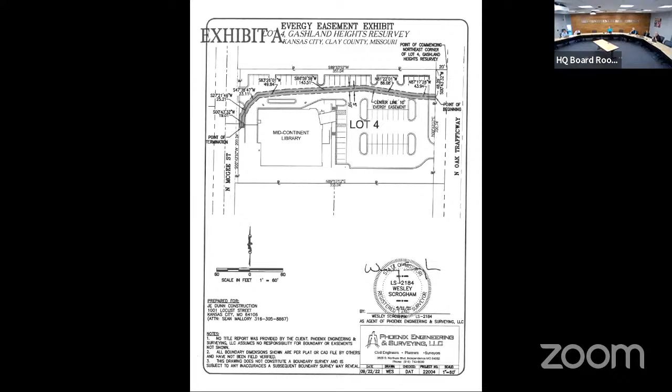Any discussion? Anybody want to make a motion? Okay, got a motion. Is there a second? I'll second that. Any discussion about the easement?

Just a question - so there's not anything that's going to happen with this easement right now? No. So this would just be in case they would ever have to do something? Just in case some sort of emergency came up, we had a power issue. We have a neighborhood right behind us, but we also have power ourselves. So it's really just - we have this on every last one of our properties. Yeah, I know, but that's basically what it is. It's just to make sure, and again, we're going through legal. Our process is we take it to the building committee and then we take it up to the board.

I would just ask that if we approve this and legal discovers something, that they let us know before it goes to the full board. Absolutely. Jake, this is an underground service, not poles? No, it's underground, correct. Any other questions? Any other discussion? All those in favor, say aye. Aye.

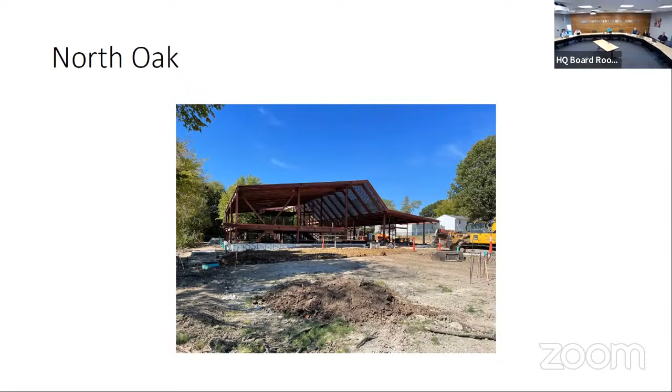Yeah. So anyway, this is the front of the building. Next slide. This is the back of the building, and you can see a little bit to the left there, they're starting to grade out the parking lot.

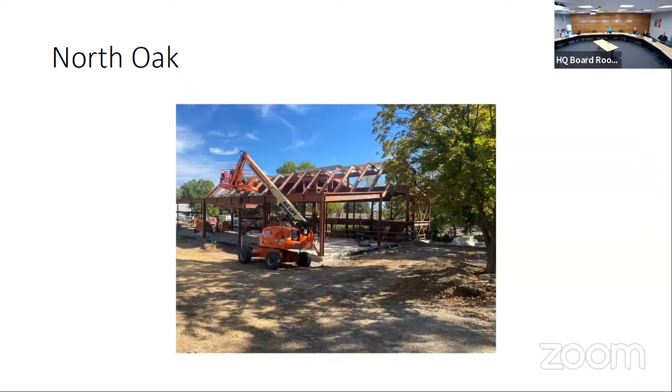Again, it's continuing along really well. It's fun to see this particular phase because you can say, I saw it then. Next slide. So this particular one is inside the building, and I put this one up because I wanted to give you an idea what it looked like. You can see on the left, and more on the right, they're putting the roofing up, and pushing it all around. This is the last picture before they roofed all the way over it. Next slide.

So this is on the main level. And this will be the stairs that go up to the area with the community room and the collab rooms. One thing I've always liked about this particular building is to the right of the stairway you'll see a really neat color that draws you to that stair. You won't see that for many months, but think about that when the building is complete. It's really neat how it draws you up the stairs.

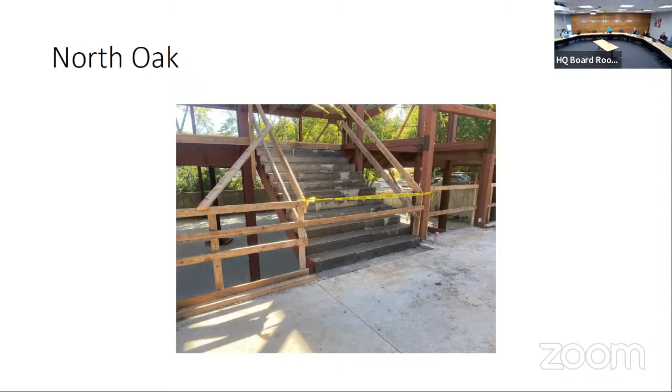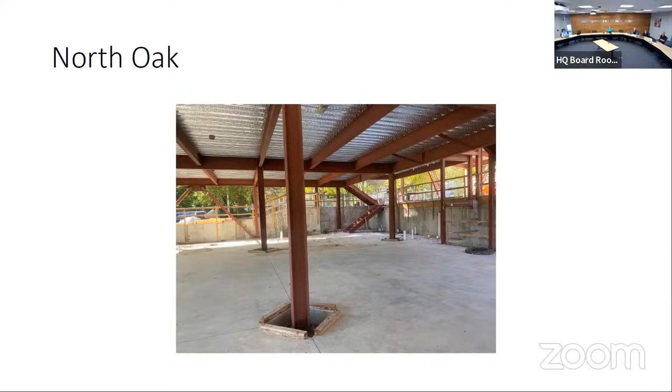Next slide. This is where the main collection is going to be housed. My next slide will give you a better idea of what this is going to look like. This is where we'll have the main adult collection. The children's section will be on the main floor as you walk in, and as you go down you'll have the majority of the collection.

From this area where the majority of the collection is, you can see the stairway and what I call the reading stairs, similar to what the Red Bridge has with the wood. Kids can step down if they want, but there are different areas to sit and work. Just above that and to the right is where the entrance is. Next slide, Grain Valley.

Can you pause on North Oak? Any questions about North Oak? I have a question.

This whole area is below ground level. There's like a 4-foot concrete wall around it. And then you've got these posts in here, and it looks like there's open space around the posts. What's happening with those posts?

Slide 6. You know, those areas are gonna be filled in. Those are the structural elements. What they've done here is they're going to reinforce these areas, and that's why it's still open.

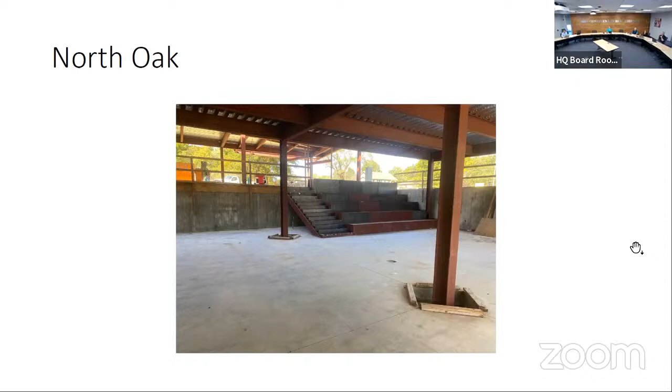Go to the next one if no further questions. So this is Grain Valley. We're just about through with the permitting process. They've got the go ahead and they're grading out the area.

Something to think about on your calendars - I'm going to steal Jim's thunder since he's not here. We're looking at a groundbreaking ceremony date, the 10th of November. We will send more of this out, but I just want to put that in your minds. November 10th is when we're looking to do this.

The big thing with Grain Valley is there's no parking. So one of the things with a groundbreaking ceremony, we got people coming in, we want them to be able to park and walk to the site. The reason we're extending it over the month is to get the ability to do some clearing and have a little parking lot area. Our backup was to transport people from the old Grain Valley site to the new site, which we might still do as an ancillary, but the main thing is we want people to be able to park and come to the ceremony. So that's Grain Valley, any questions?

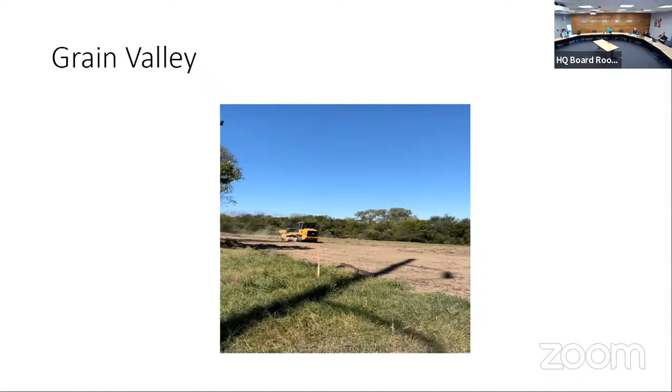Anticipated completion date for that one? This one's a little tougher. I'm thinking that this is going to be late summer of 2023.

East Independence is probably going to go out to bid at the end of this month. Then we will gather up everything. I will discuss with JE Dunn what the GMP looks like. I would like to propose that the building committee meeting next month happens right before the actual board meeting, because we typically don't have a board meeting in December. If we were to do a building committee at the end of the month, we'd have to wait almost a month.

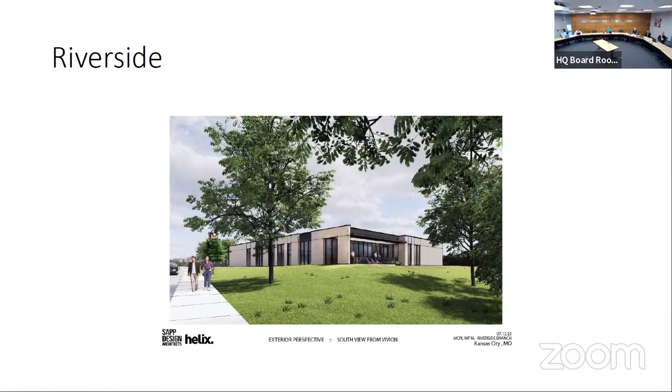Go back to the previous slide, please, Cody. With the building. Because I will tell you that the first time I saw their schematic drawing, it was kind of blah. I was like, I want this to look more, I wanted it to fit in better. Susan can verify for me, that was one of the first things I said to them. They don't like hearing that, but it's our building.

I really like the way this looks now. It's going to be pretty easy to see from either side. It's going to be its own cozy kind of thing. It's got that neighborhood library feel, which is what I think we're really pushing for, that's what we need to have. The mayor of Riverside probably will be really excited the first time she lays eyes on this.

The only question I have is that library sign down there, sitting on the ground. That's a good question, I'm going to address that and see, I think the reason why they put it there is because even if they put it on the roof, you might not be able to see it given the way the property itself is laid out. But I'm going to ask them about that. Maybe you could put it on this end down here, or above the entry. That's the only comment I would have, that library sign.

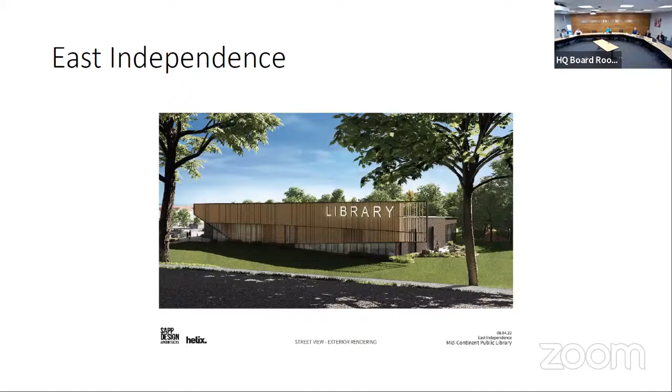So this is the first time that we've always, in each of the new building designs, made the library prominent and visible in a way, and it shows up there almost like a medallion. So anyway, I think that they can address that or find a way to do that. I really appreciate your comments.

I'll get back to it. I like this stone, you get stone in the paver, that's a nice touch, I really like that. It's just that nice entryway, you know, welcome. And because there's a little park on the other side, you've got that as well. Those are cool - they give it a nice, there's a little bit of texture.

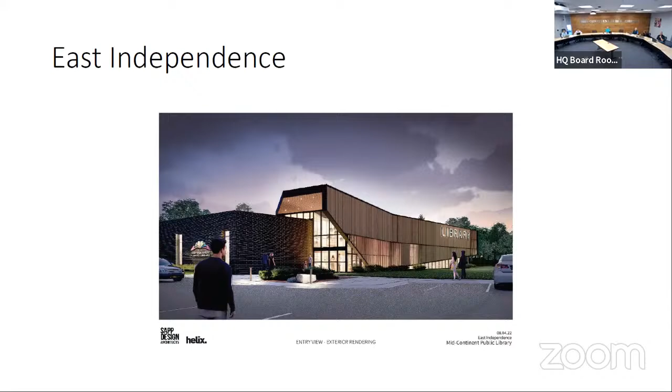Cody, can you advance it back to the Riverside slides, Jake? Right there. Hey Jake, I'm sorry, which direction is that facing? My cardinal directions are a little off, but what I'm gonna say is to the right is gonna be across from the city hall, and to the left is gonna be... does that make sense to you?

Yes, so the word library faces Vivion. Yeah, so to me, looking at this, that corner facing out, that corner right there faces like northeast sort of - that'd be right, Jake? I believe so. My cardinal directions are a little off because I'm still working through it and everything like that, so I apologize.

But yeah, no - that's a drive-through on the backside, I presume. Okay, because I see a little view. Well, actually, you can see part of the drive-through up to the upper left. Oh yeah, I see it.

So the parking lot is to the left of where the people are. They're walking in from the parking lot, and then they'll drive up and through and then come around.

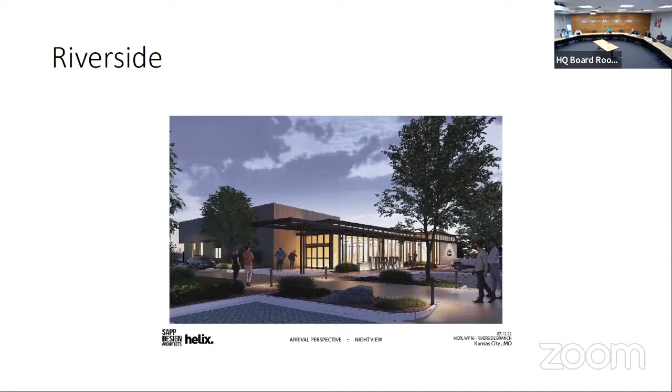Okay. Would be the, yeah, let's go to 5.

As a setup for this, Michael and I met with Jake over a cup of coffee, and Jake started talking about Woodneath. You think, well, what's left on Woodneath? Because we've done the house, built the library, the auditorium is there, and he had some thoughts. This is Jake's thoughts about things we should think about. Understand this is probably our signature property in the entire library system, given the investment, the historic resources, and the land we have there, because we don't have any other site with 33 acres.

So this is a thought about what we might do next, really around the grounds. I want to take you back a little over 10 years ago. The Woodneath Master Plan, as it was in its original inception, I just looked this up, is dated September 21st of 2012. And now here we are in October 2022, trying to see through the vision of what the actual property itself needs to look like.

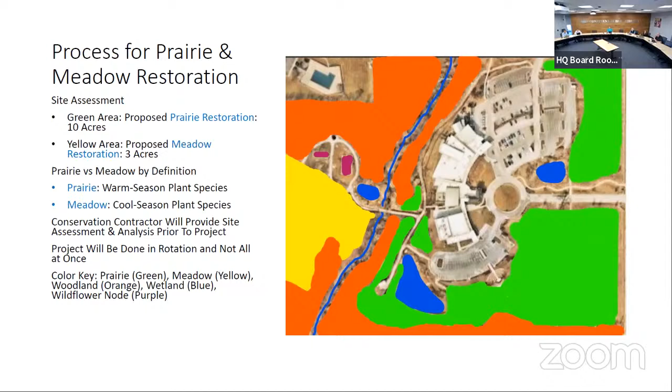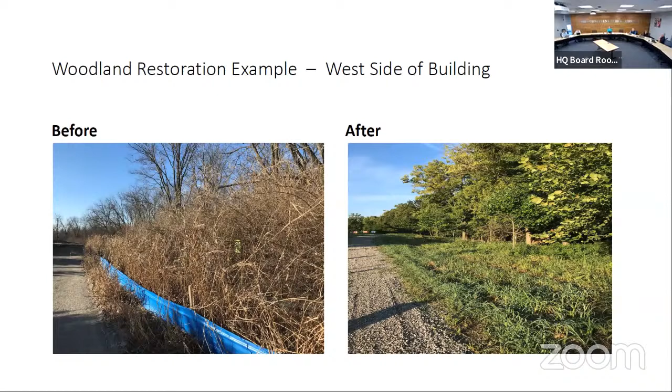What we're working on right now is cleaning up standing water and drainage issues, and getting the grass growing nicely around both of those areas. When you go up there, there are a couple signs off the trail we've already put up. If you haven't had a chance to walk out there, the weather's getting really nice for it—it's pretty neat, and they've done a fabulous job on the signs. If you get a chance, you should go check them out.

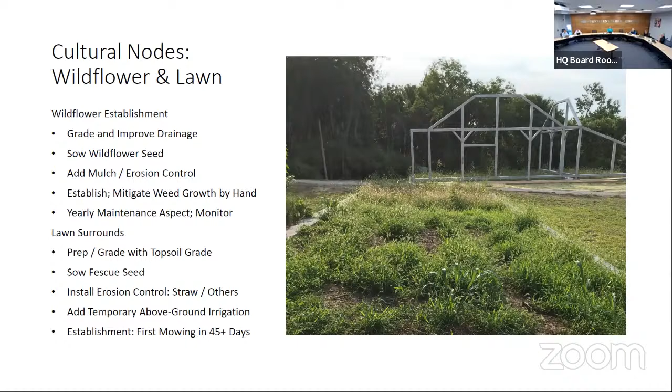I never looked at it that way, but it really does make a lot of sense. When you think about it, we didn't have Johnson grass issues 5 years ago, but we do now. That's why. So the wetland area is just a nice way to continue the natural progress we have out there.

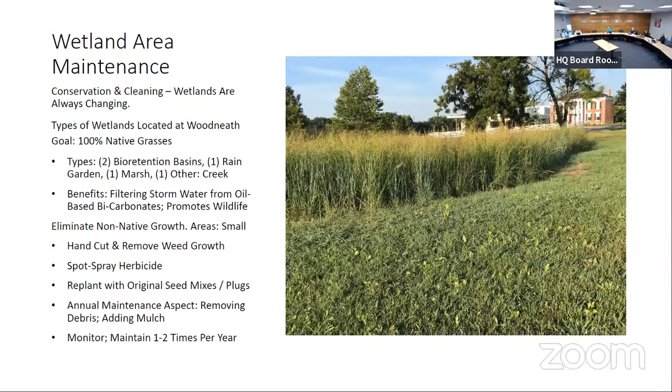Next slide, the walking path. We talked about the walking path quite a bit. It's right now an AB3 composite. It's really nice, but it does require maintenance. You do every now and again see weeds coming up through it, and unfortunately that's really hard to fix.

We also see some drainage runnels that come through on certain areas when it rains. I'll say that when it rains fairly hard, this path is difficult, so I'm trying to find a way to finally push forward for the final phase to put some asphalt in.

I feel like when you look at a lot of our major parks around the area, whether in the city or the county, most have an asphalt trail going through the woods, so it'd be no different here. I know it takes a little away from the naturalness, but I'm thinking about when it rains hard or snows and melts, the trail essentially becomes impassable, so we don't get anything from that.

But if we had asphalt, someone could be walking on it literally right after the rain or while it's raining, and we wouldn't have issues. Not only that, but from a maintenance viewpoint, it's pretty expensive. Paying up front for the asphalt is essentially what it would cost us over the next 8 to 9 years to maintain the current path. So then you get a 10 to 15 year trail that we just occasionally patch. Plus the drainage will incorporate good drainage into it, so it stays clear going forward. And finally, from an ADA viewpoint...

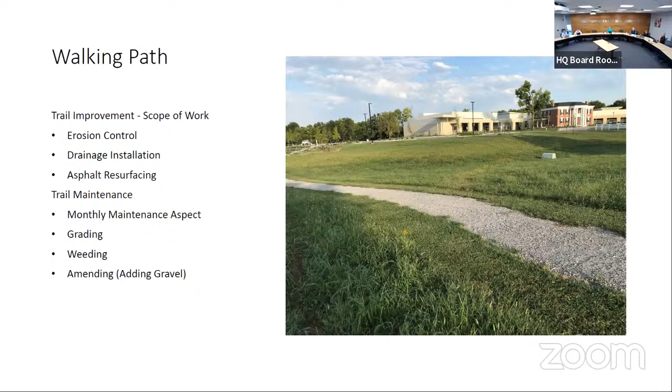Just wanted to tell you we're working on lawn surrounds. This is mainly around the auditorium area and the main area. We're putting in an area that's basically going to stop the weeds eventually, and it's just going to be trimmed down a little bit so you have the ability to walk out a little, maybe look at the grass, but it's not going to come all the way up. We're not going to mow it to that fine tuning all the way out, but we should mow it a little bit in the area because it's pleasant to the eye, and it does serve a natural process.

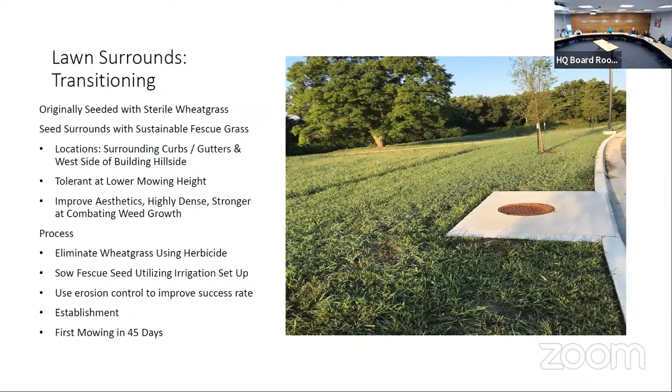So that's kind of the end of the slides. I really wanted to get this in front of you because I want to make sure this is the same idea that you have, because I've heard a lot of different things in my 5 years here. So what we're going to do, this is what I feel is the best way to push forward.

And I'm not going to take credit for the majority of the work on this. Our landscape coordinator, John Green, did the majority of it. John does a great job coordinating the landscape on all of our branches. He's got a great heart. He really wants the plants to be natural and native and for everybody to enjoy the property as they come into it. So with that, I'm going to leave it to you.

Any questions? But what I hope from you is that you're okay with this, because it's going to cost a little more up front to get where it needs to be from a maintenance viewpoint. But eventually, I think we're going to be able to ease off of that. We have to spend money up front to do this. But again, I go back to 2012 - this is what they drew up in 2012. We are now finally to the point where we can actually make that vision real.

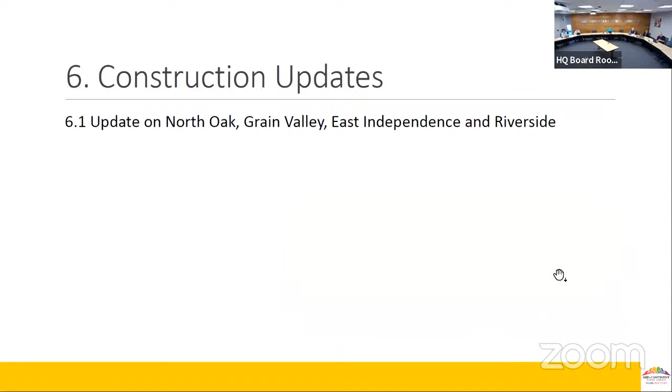I think we all have this little fond feeling for the Farview Neighborhood Library, what it is and what it represents. Jake and I were talking, and I thought it'd be good to get an update because we're at a point that we need to think about what that might look like going forward. The MOU ran through last spring with another year option, and Steve was still here. He met with Fort Osage primarily to make sure we were okay extending it 12 more months, and everybody agreed to that, especially in light of COVID. It really didn't get tested, but we wanted to make sure it was working and doing what we wanted it to do. At this point, we believe that it is.

If you're there on a Wednesday morning when the food pantry is open, it's just a phenomenal partnership. The MOU does come up again in March. At that point, I have not yet met with CSL and Fort Osage to find out what to do, because Fort Osage actually owns the building.

I don't know if they are willing to continue to own that building or if we need to take that on. Right now, they take care of the lawn, and we do snow removal. If there's any major issues with the building, they take care of that. Right now there is not, so it's a pretty easy lift for them currently. We maintain the inside, make sure it's cleaned, pick up trash, and all of that kind of stuff outside.